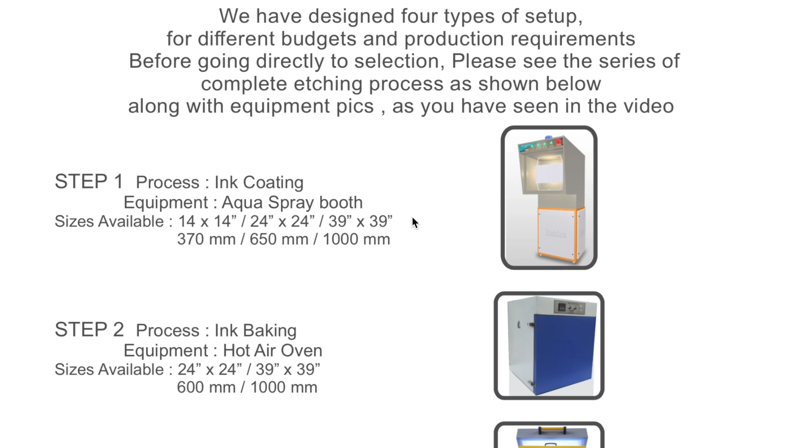Let me take you briefly through the complete process you have seen in the video. Step 1 was ink coating on the metal sheet, and here we have 3 sizes mentioned. Then you bake it inside the oven.

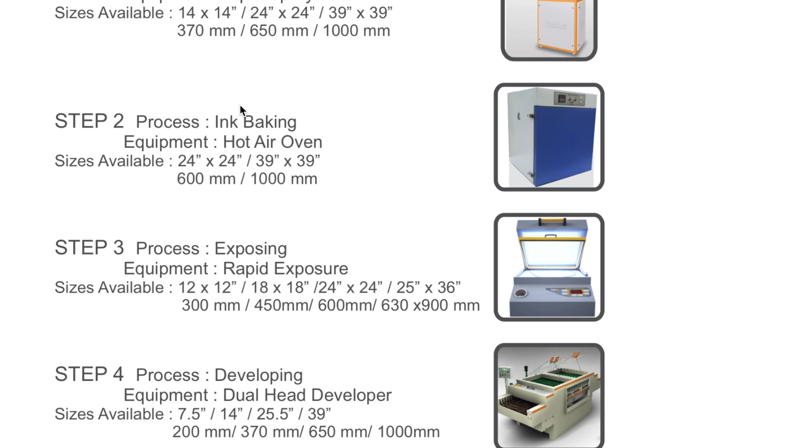Step 2, we have 2 sizes. Then after baking, we put it inside the exposure machine. We have 4 sizes here in the exposure machine.

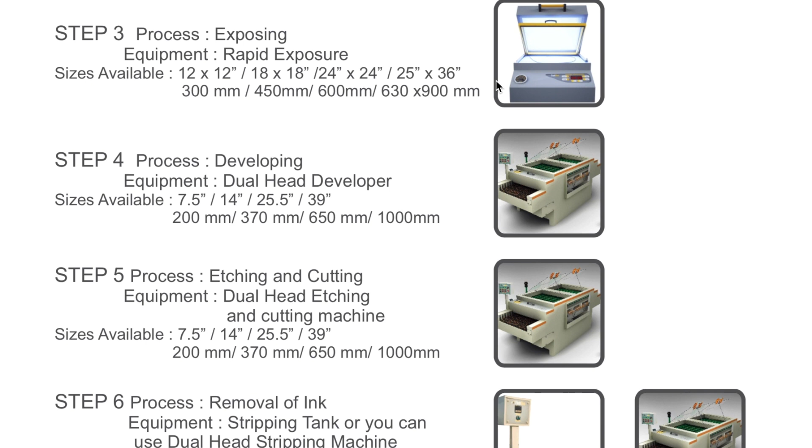After exposing the plate, you have seen that nothing is visible on the plate. You have to put it inside the developer machine. Now the conveyor machine would start from here, and this conveyor machine has again 4 sizes.

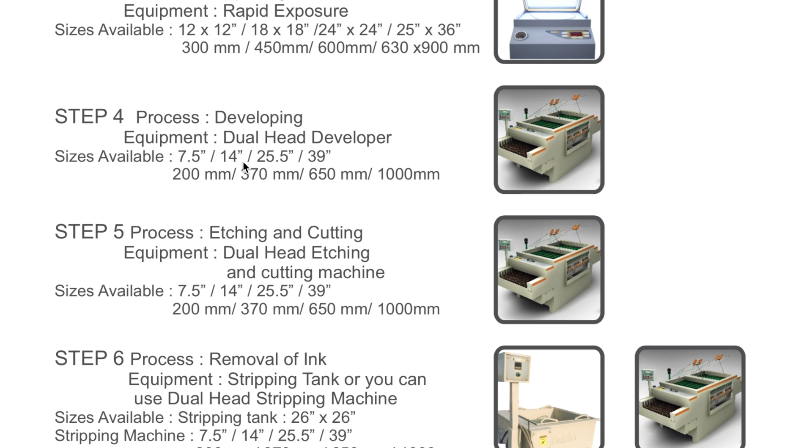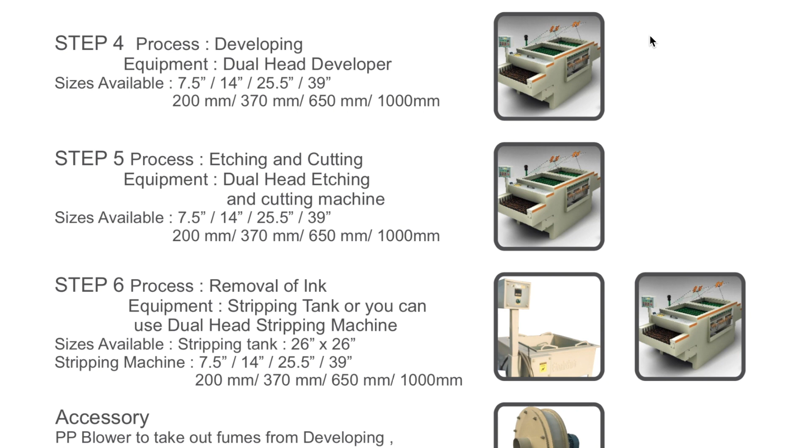Taking it out from the developing machine, you have to clean the plate with water manually, or possibly by adding one more conveyor line next to this machine. This is just an idea if you want an automatic line system. So after developing, you'll clean it manually or by machine.

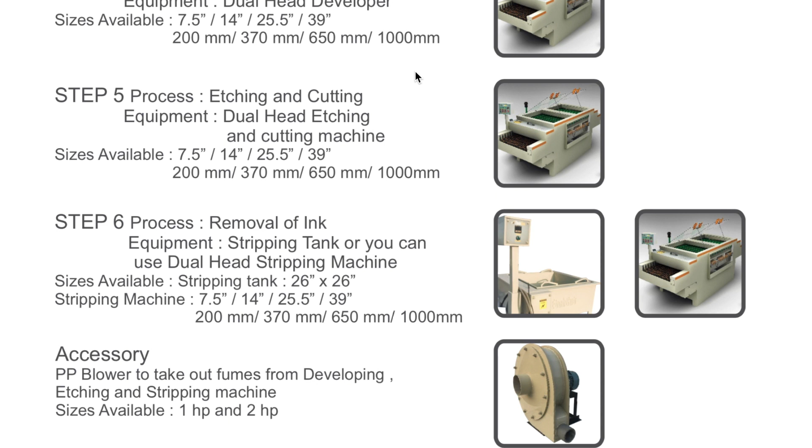You put it inside the etching and cutting machine. This is again the conveyor machine, and it has the same 4 sizes mentioned here.

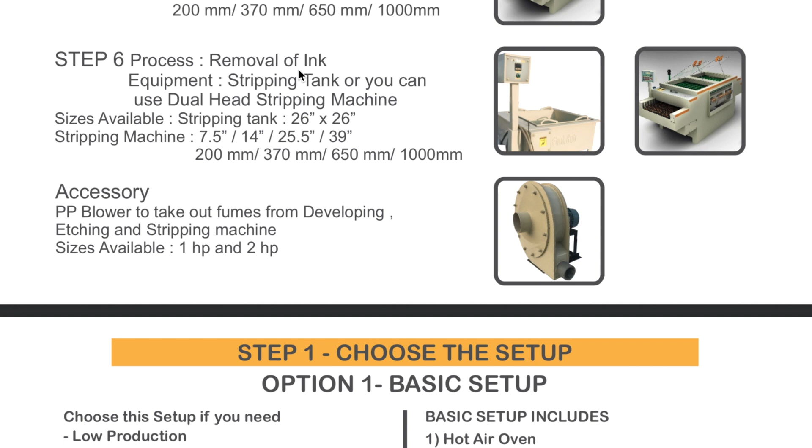After taking it out from the etching and cutting machine, you'll put it inside the stripping tank or a stripping machine to remove the ink which you applied using the aqua spray booth in step 1. Again, we have the same 4 sizes here.

Along with the setup, you would need an accessory called a blower. This is required for the developing, etching and stripping machines to take out all the fumes. We have 2 sizes mentioned: 1 HP and 2 HP. The 1 HP is a smaller fan for small setups, probably for 7.5 or 14 inches. For 2 HP, blowers generally come with 25.5 and 39 inch etching and cutting machines.

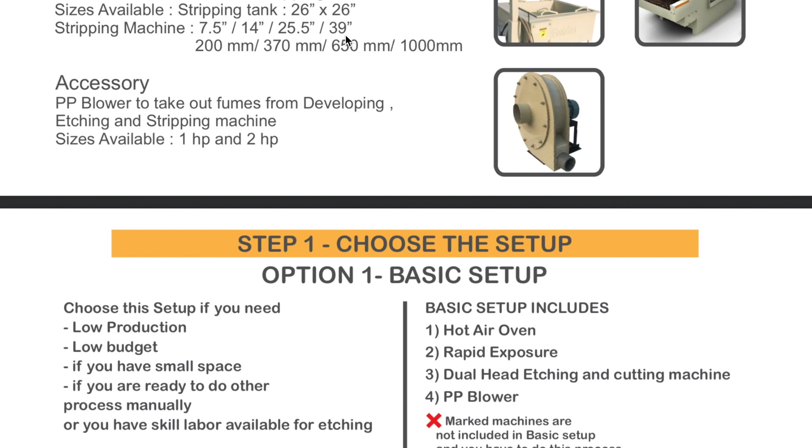Coming to step 1, choose the setup. Let us start with the first setup.

This is option 1, the basic setup. Basic setup means you should choose this if you have low production, low budget, or a small space, and if you're ready to do other processes manually, because the basic setup means you're not buying everything. You are just buying the necessary machines and equipment. So your factory should have skilled labor available for etching, because not everything is done by the machine here.

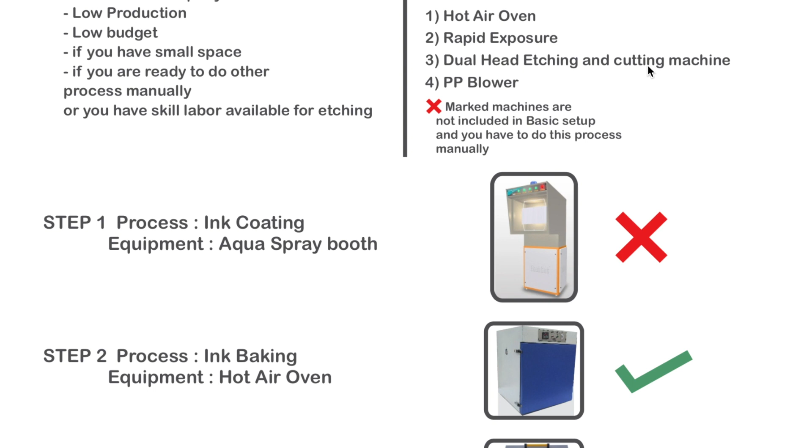What does it include? Basic setup includes the oven for baking, exposure to expose the design, the dual head etching and cutting machine as the main machine for etching and cutting, and a blower to take out fumes. All the pictures that are cross marked are not included in this setup.

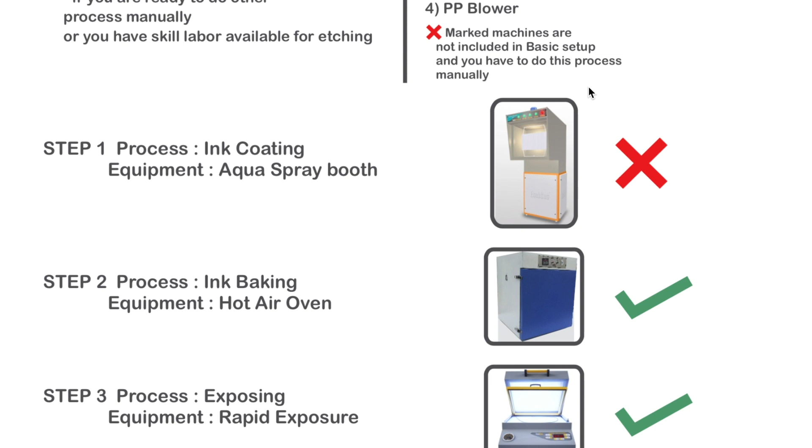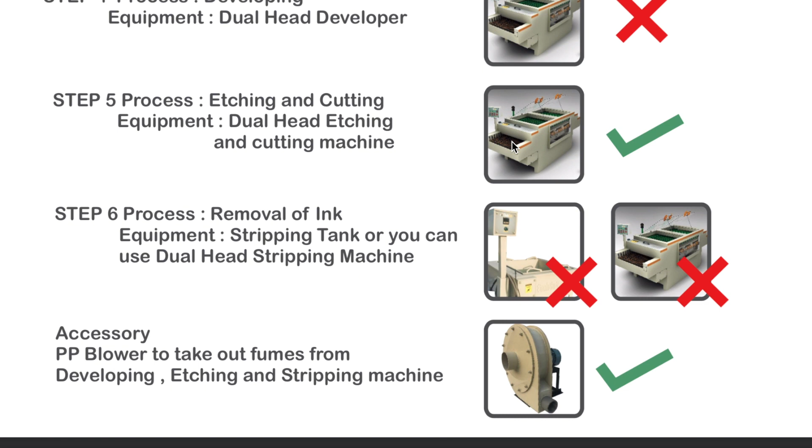The spray booth is not included. You have the oven, then exposure. You don't have a developing machine, but you can do this process manually as shown in the video. Then you have the etching and cutting machine, and a blower to take out the fumes. So this is option 1, called basic setup.

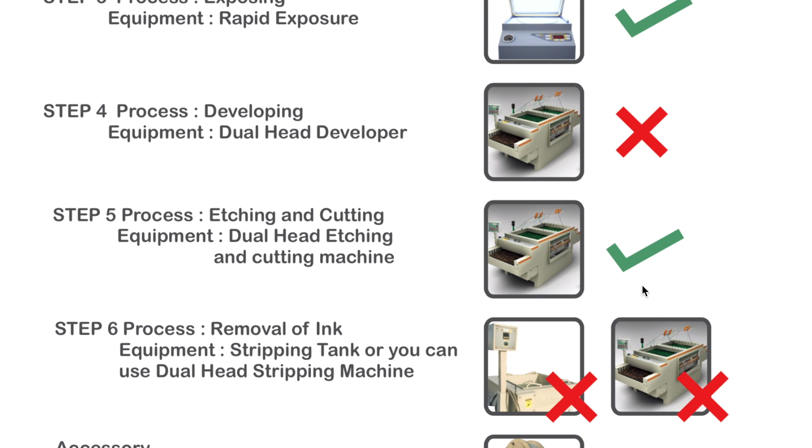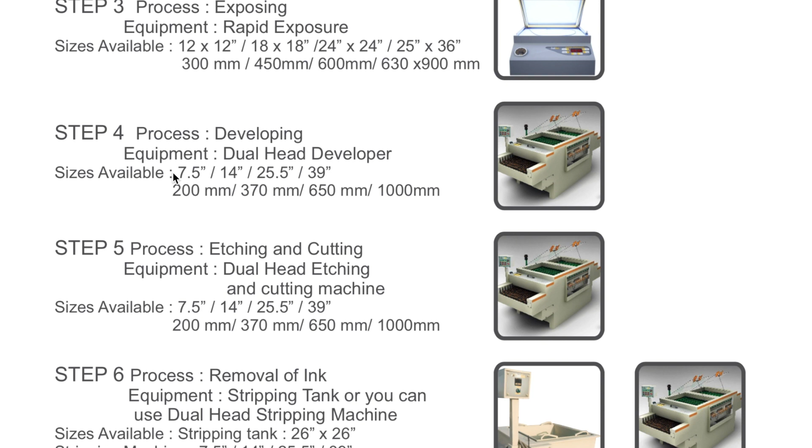Now you can see on the first page we have given sizes along with every machine. So if you want a basic setup, you can choose which setup you want: 7.5, 14, 25.5 or 39 inches. That's how it will go.

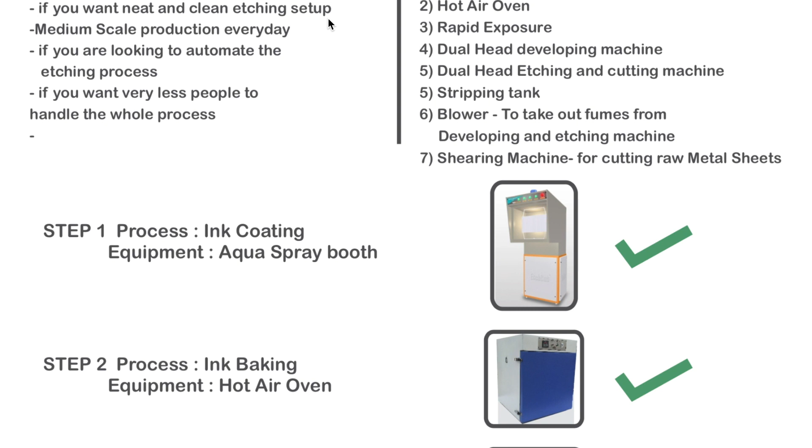Moving to the second option, the semi-automatic setup. Choose this setup if you want a neat and clean etching setup, because most of the process is done by machine, so your floor area and factory remain neat and clean. This is for medium scale production every day, meaning if you have etching work every day, this is a good setup for you.

Even if you don't have production every day, if you need a neat, clean and automatic setup where you don't need skilled labor, then semi-automatic is the best setup if you want very few people to handle the whole process.

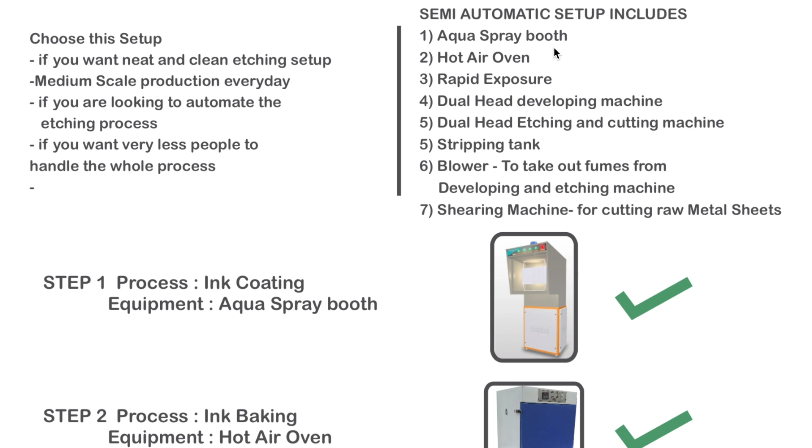What does it include? It includes the spray booth, oven, exposure, developing machine, etching and cutting machine, stripping tank, the blower for developing and etching machine, and the shearing machine for cutting raw metal sheet.

We are not giving an image for the shearing machine. It's a very common machine to cut metals. This semi-automatic setup includes that shearing machine so that you can cut metal before doing the coating.

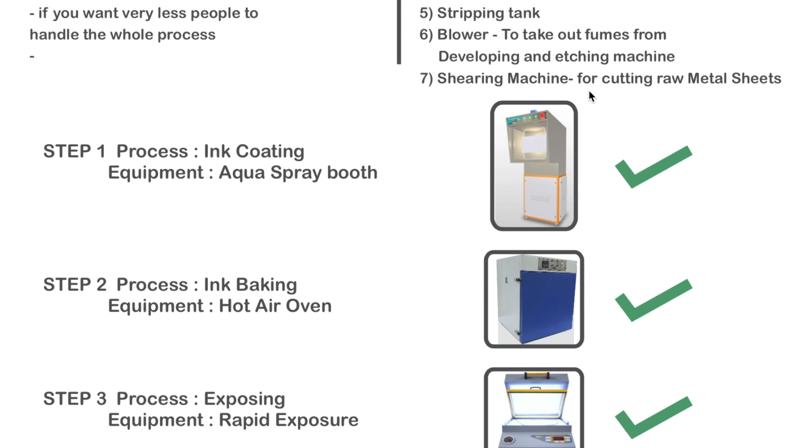Step 1 is ink coating, and it is included. Then the oven is included, exposure is included, the developing machine is included, and the etching cutting machine is included.

Instead of a stripping machine, we are given a stripping tank. The stripping tank is a lower cost equipment compared to a stripping machine, so if you have low production, you can go for a stripping tank. But if you have more production every day, I recommend going for a stripping machine.

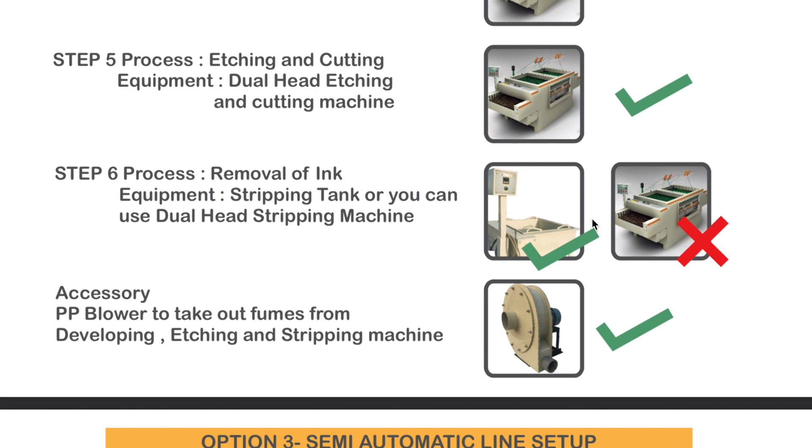This semi-automatic option does not have a stripping machine, probably in the next setup. Then you have a blower for developing, etching and stripping.

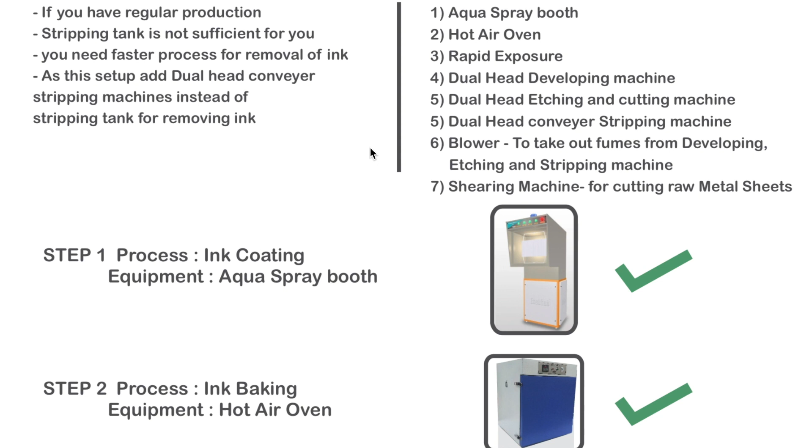Now coming to option 3, the semi-automatic line setup. Semi-automatic line means if you have regular production and a stripping tank is not sufficient for you. So the main difference between semi-automatic and semi-automatic line is this machine, the stripping machine.

This is a very important part here. If you have regular production, it will go one by one.

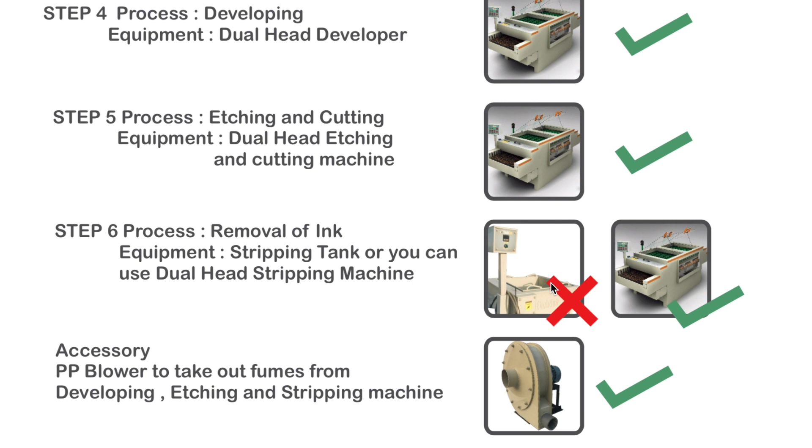This stripping tank is basically designed if you want to keep your system low budget. In this setup, you get the blower for all 3 machines: etching machine, developing machine, and stripping machine. Coming to the next option, which is an automatic line setup.

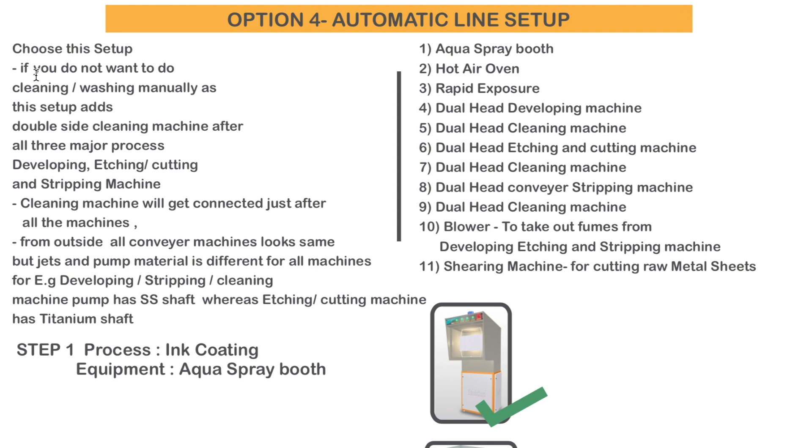Automatic line setup is like everything done by machine. So here are some tips. If you do not want to do cleaning and washing manually, this setup adds a double side cleaning machine after all 3 major processes. This is the same machine as the etching and cutting machine.

It's just that the material of the machine is different. Inside the titanium shaft, which is there inside the pump, instead of titanium shaft, we give a stainless steel shaft. So it hardly makes a difference on costing, but it makes a lot of difference on production and working style, because now you don't have to do anything since everything is done by the machine, including the washing.

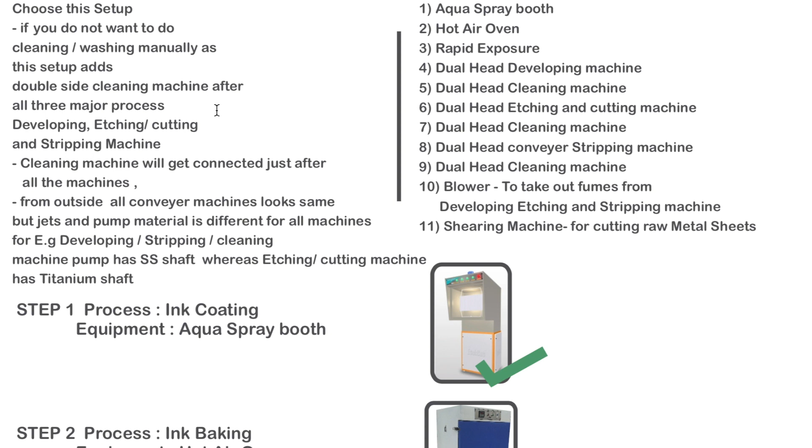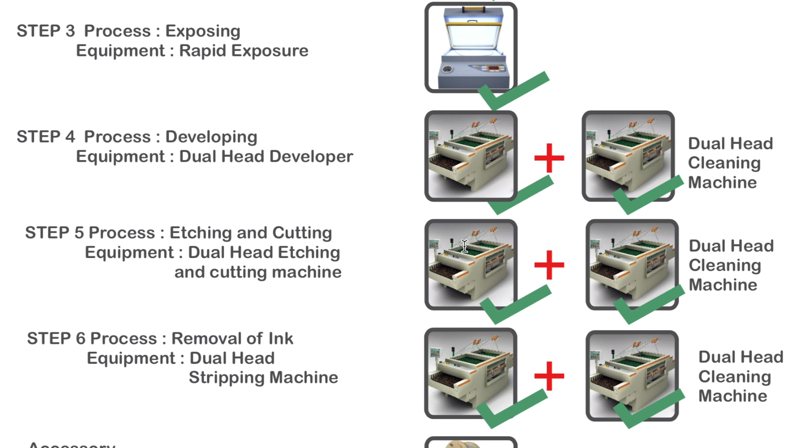This is basically designed for a complete process. What does it include? It includes the spray booth, the oven, the exposure unit. Then you put it inside the developing machine. From the developing machine, it automatically goes into the dual head cleaning machine, so it gets cleaned automatically. Then you can put it inside the etching and cutting machine. After etching and cutting, you put it inside the cleaning machine, then stripping, then cleaning again.

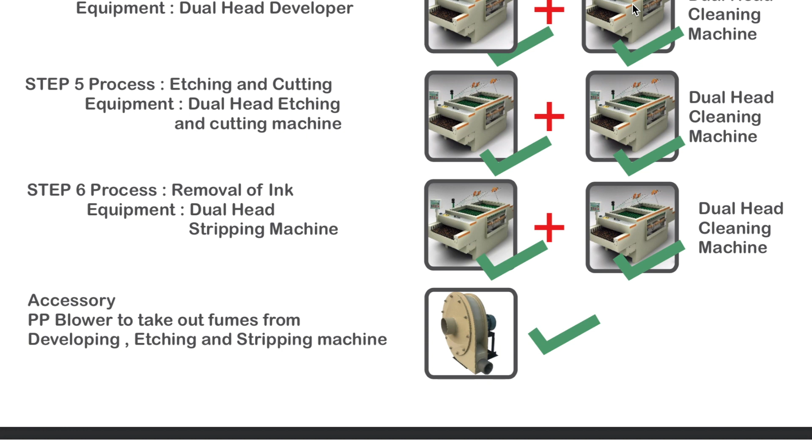So all these 3 major processes each have one more machine attached, and both machines would look the same. As you can see, we've given a reference image here. Both machines look the same; only the parts we use inside the pump are different. Then we have a blower for all the machines. So this is a complete semi-automatic and automatic line.

Now step 2: after you've seen all the setups, you have to choose the right size depending on your requirement. We have 4 sizes to choose from: 200mm, 370mm, 650mm, and 1000mm. Simply mail us your choice of setup and size, and we will send you the quote ASAP.

This is a very important part. If your general requirement is small sizes of sheet, but you need to produce in quantity, you can always choose to buy a small developing machine with a bigger etching and cutting machine, as bigger machines aren't designed only for bigger sizes, they're designed for more production. For example, you can buy a 650mm developing machine with a 1000mm etching machine.

The developing machine takes only 3 to 5 minutes, it's just a one-time process. But etching takes almost 15 to 20 minutes. So it becomes easy to feed the etching and cutting machine, because the developing machine will stop working after some time, but your etching machine will keep working for 15 to 20 minutes. So it's just a tip to help you save time and money.

This applies only if your general plates are smaller in size. But if your requirement is always bigger sizes, then of course you should go for the same developing size and the same etching and cutting size. This is a very important part.

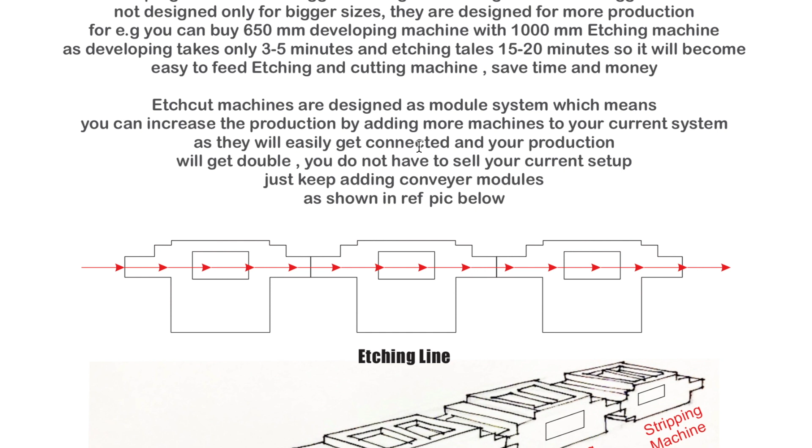We have designed our machines. Etchcut machines are designed as a module system. Every machine is a module, which means you can increase production by adding more machines to your current system, and they will easily get connected, doubling or tripling your production.

As you can see in the reference image, I've connected these 3 machines. So it's not necessary to buy all 3 machines together right now. You buy one etching machine today, let's assume 650mm. That will give you 900 square inches in 15-20 minutes, and when you want to develop your production further, you can add one more machine. The machines are designed so they connect easily to each other.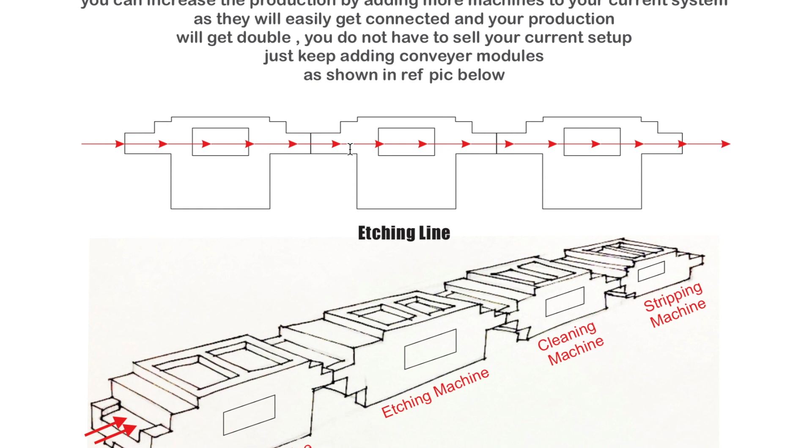Now let me explain a little bit about the etching line, since this is the next step. For example, after buying this setup, whether semi-automatic, automatic, or basic, you don't have to sell anything to increase your production. You can always buy more machines and keep adding to them to increase production.

In this reference image, the first one is an etching machine. I'm trying to show you an etching line. This etching line isn't listed as an option; you can email us with your requirement and we will design an option for you.

This is the etching machine, then this is a cleaning machine. When you put your plate in from this side, it goes through etching for 5-10 minutes, then it goes directly to the cleaning machine, which cleans it automatically, then it goes into the stripping machine, which removes the ink. This line continues, and you can add one more cleaning machine to extend it. This is known as an etching line.

So if you have very high production needs, the right option for you is an etching line. For an etching line, you can drop us an email at info@etchcut.com.

I hope we made this job easy by creating this selection guide for the etching and cutting machine. Now just choose the setup and select the size you want. We will send you our quotation as soon as possible. Thank you.